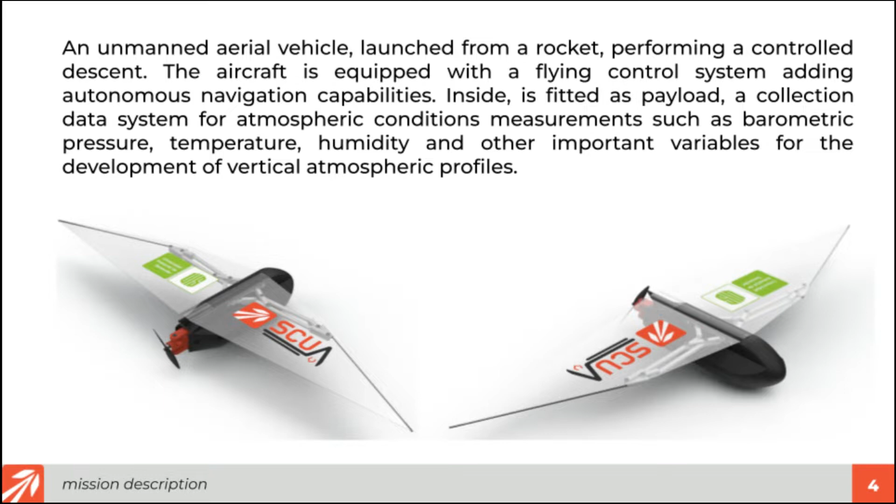Inside is fitted as a payload a data collection system for atmospheric condition measurements such as barometric pressure, temperature, humidity, and other important variables for the development of vertical atmospheric profiles.

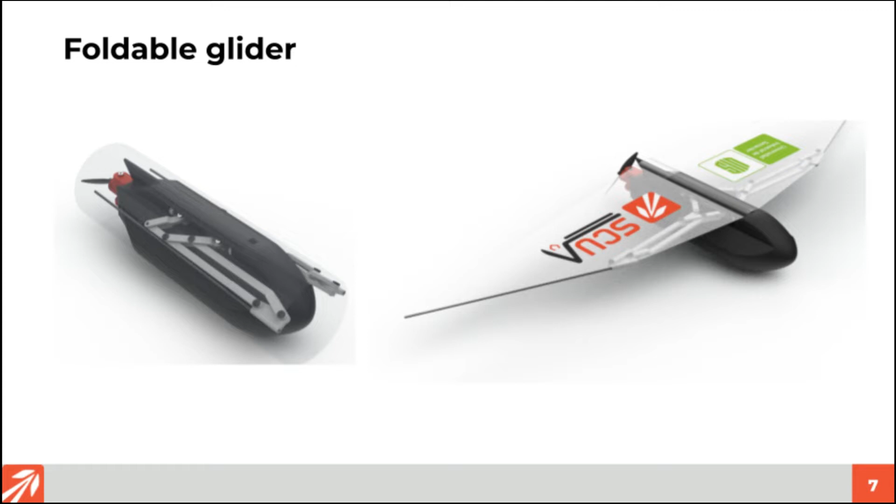In order to fit a flying vehicle inside a 2-unit CanSat volume, we decided on a foldable wings configuration with 3D printed parts conforming the structure, which is a bio-inspired mechanism based on the bird's alar structure and a flexible membrane simulating the feathers.

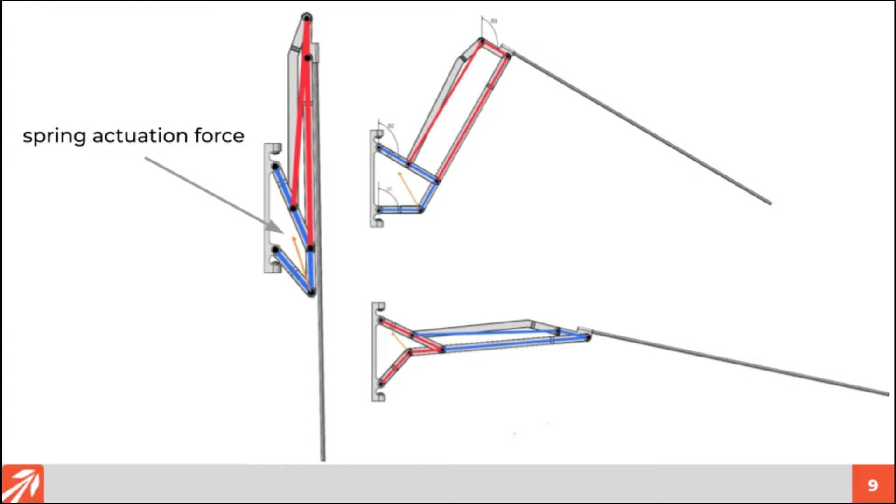The wing's structure is conformed by two 4-bar mechanisms, linked between them in a way that the actuation of one part results in the deployment of the whole wing. The actuation is made by a spring located inside the fuselage, and a nylon string directs its force to the mechanism.

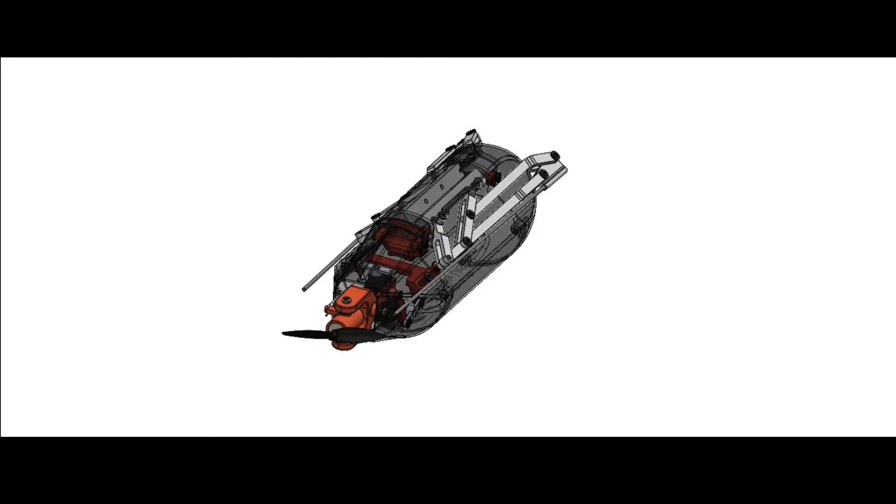A long screw located in each one of the wings is retained by a C-shaped slider that will be actuated by the pitch control servo, releasing the wing and leaving the space for the control mechanism to move once the deployment is completed.

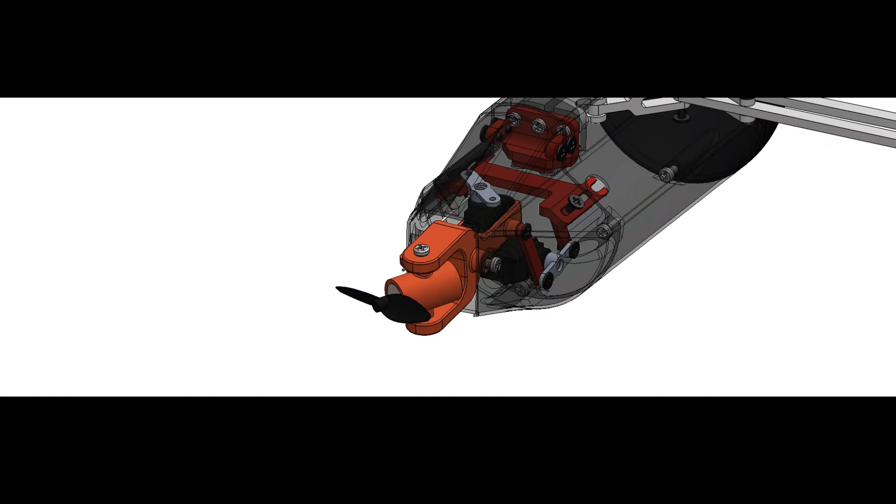A gimbal mechanism located in the tail section allows us to orientate the motor while rotating it about 2 axes, changing the thrust vector direction and then generating reaction forces that will result in the yaw and pitch control of the aircraft. This mechanism is actuated by 2 small servos that will be connected with push rods to the mechanism.

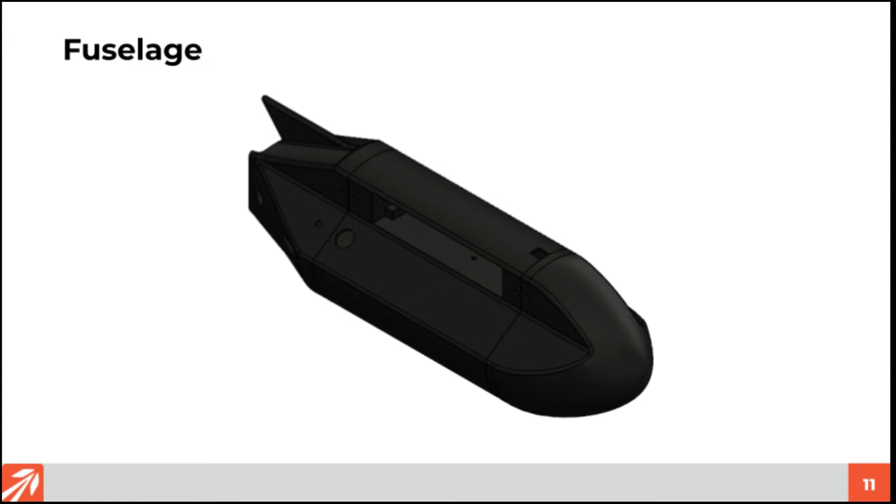The fuselage has a cylindrical shape, with 2 cutouts for the wings mechanism and a rounded nose to have good aerodynamic performance, and it is made by 3D printing. The nose and middle section of the fuselage are free of mechanical components, leaving enough space to fit the electronics and modify the center of mass.

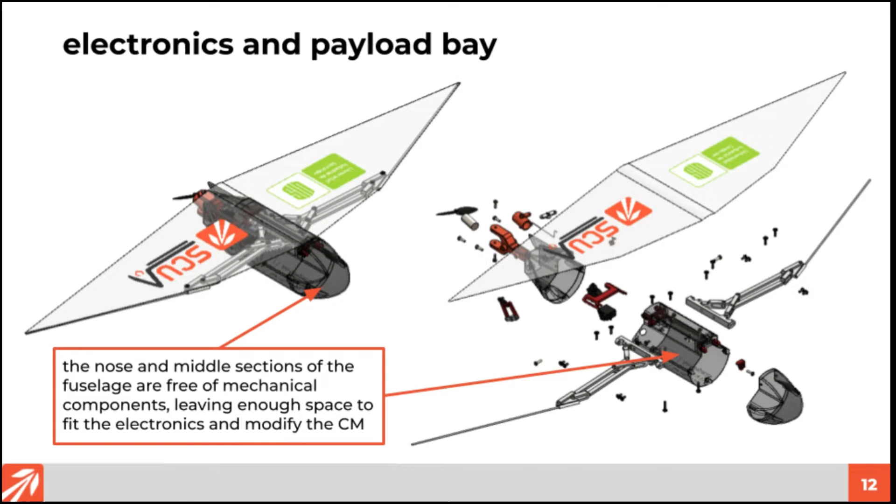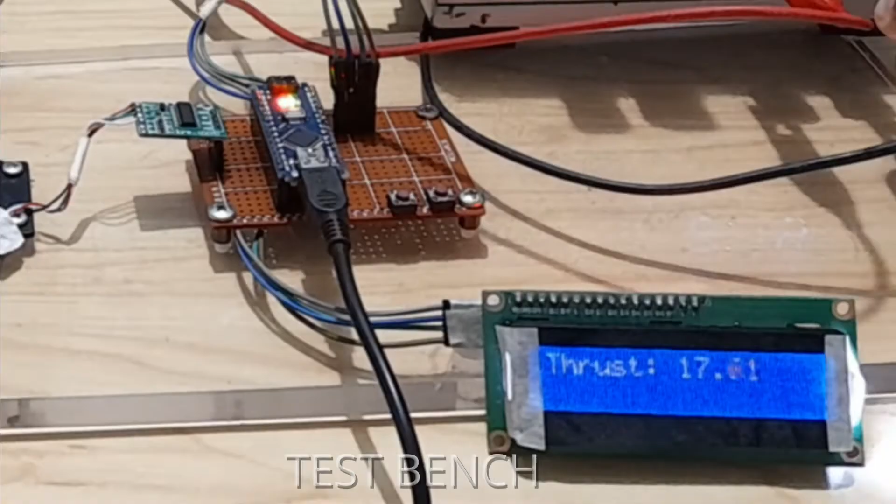As a motor, we are using a 20mm coreless motor with a 6 cm propeller, generating up to 30 grams of thrust. The CanSat has different electronic systems. The power subsystem provides 5, 4.2 and 3.3 volts through buck voltage converters with capacity to deliver up to 3 amperes.

The central computer is an ESP32, which receives information from avionics such as orientation, acceleration, compass, and GPS. This data is sent to the ground station through LoRa modules. At the same time, it is stored in an SD card.

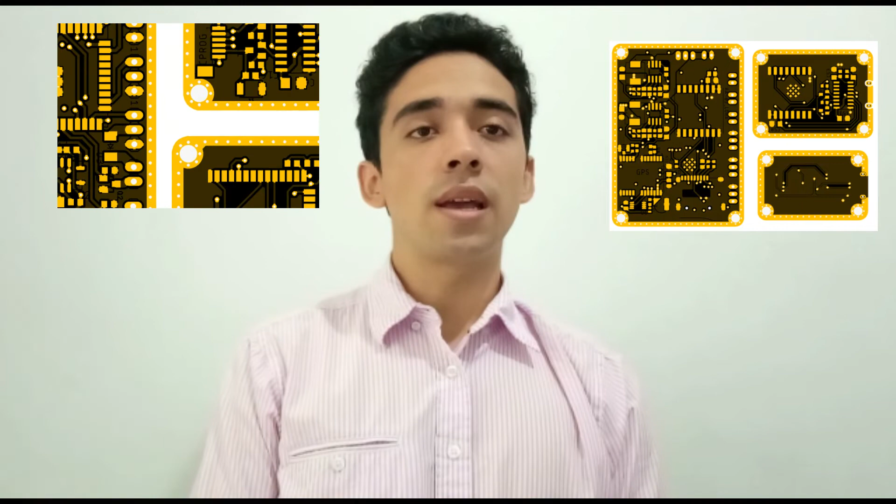As payload, we have sensors to measure carbon monoxide, carbon dioxide, nitrogen dioxide, ammonia, volatile organic compounds, temperature, humidity, and a video that will be recorded by an ESP32-CAM. This video will be sent to the ground station via Wi-Fi. This ESP will also work as a redundant telemetry system. These subsystems are integrated in SMD components on two 4-layer PCBs to optimize the space inside the CanSat.

The CanSat's flight computer is composed of an ESP32, and the payload subsystem is composed of an OV2640 camera and other sensors. To send all of this information through the communication subsystem, we use LoRa to transmit housekeeping and sensor measurements to the ground station with a range of up to 10 kilometers. Unfortunately, it has a low data rate.

On the other hand, to take advantage of the ESP32, we decided to use the long range operation mode to transmit pictures of the CanSat trip. For that reason, we improved the communication subsystem, especially at the receiver stage, using a high gain parabolic antenna and an omnidirectional dipole antenna in the transmitter.

Now we're going to present you our estimated budget and our schedule for the next days. We have already prepared our first prototype. In the next days, we're going to be making some simulations and flight tests.